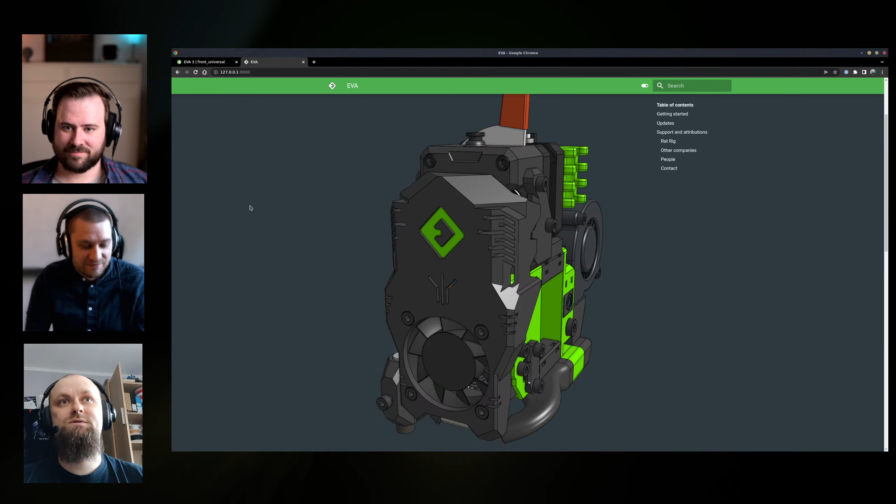But first the caveats, right? So I don't have all the hotends that we had on EVA 2 yet. So I guess make a poll on Discord and vote which one should be first to create, and I'll chop them into smaller increments and add those and prioritize in this way. So like Revo, it's almost there, but I know a few people ask about Revo, so it's going to be there soon. Right now it's BMO, Mosquito, Nova, and Rapido.

So they will come. Drives, got rid of all the front heavy ones, those are not going to be on EVA, it doesn't feel right. BMG is there kind of by accident because Mikkel forced me, since he needed one to test. Revo High Flow, please.

Yep, so yeah, make that poll, that would be best to make that poll on Discord, and then I'll do almost all of them in that priority.

What else? Yeah, drives, cooling inlets, I guess, that's one thing. The other thing is that for V-Core 3, if you cut your belts super tight, you need to order more belts, so be sure to remember that because it's not written anywhere.

I will publish the files and the documentation page in like 30 minutes after this.

What else? Yeah, chat has a good clue already. They're saying heat inserts.

Yeah, so there's every part. Let's jump into parts and maybe I'll remember, and you guys remind me or comment or stop me when I'm being stupid about something. So let's go to the document. I hope you can see.

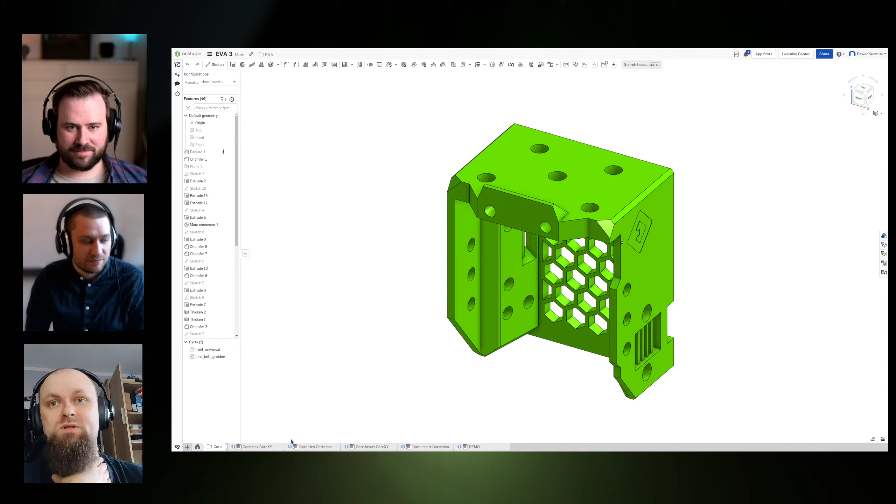Ah, you fell out again. Yeah, your audio died. You could hear the chitter and then it died.

So Mikkel, sing your best songs now. I stopped myself when he said 'you stop us' - I was almost about to sing Stop in the Name of Love.

Yeah, time for bad jokes, I guess. I wonder if people can hear us, or if we are just talking together. No, it sounds like - I checked the stream, it sounds like they can hear us. It's just Pavel's mic is dead. Okay.

I guess we can just fluff a bit in the meantime. Yeah, I think so.

So obviously, all of this stuff is Pavel's vision, dream, work.

And I've been working a lot on the- sounds like something's happening now. Is it noise? White noise. Yeah, it's completely over amplified now.

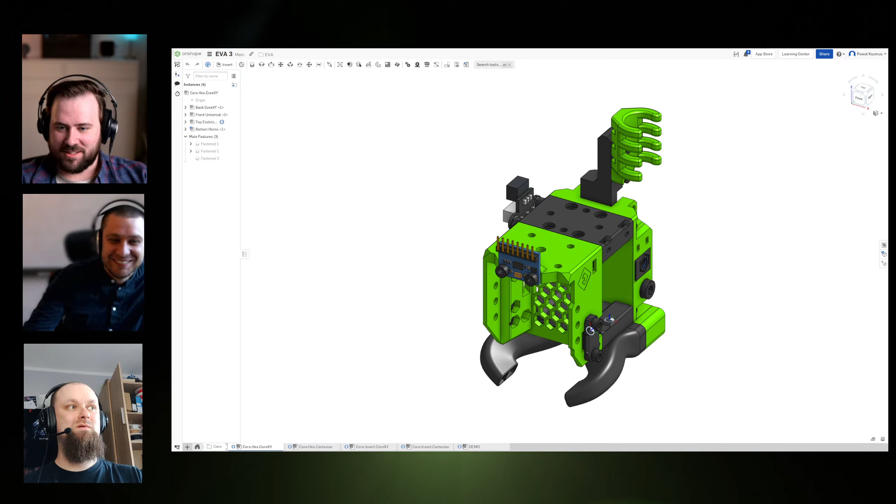Yeah, but... 1 2, 1 2, too loud? Yeah, it sounds better now. A little bit on the loud side. 1 2, 1 2. Perfect.

Sorry about that. So yeah, it's probably, you know what it is? It's probably the tea I spilled on the USB ports, and now probably everything that's the audio thingy from the headphones that I had on the USB - I probably need to do something with the USB or the motherboard. Great, yeah. All right, sorry about that. It's like, yeah, tea does something with electricity. Yeah, okay, that should be better. I'm not connected directly to the sound thingies in my PC. That's a technical term, by the way.

Okay, so Eva, the core of it, right? So the top, the bottom, which has the integrated duct right now - kind of still on the fence with it. Don't know, right? It's kind of easy to change, not as easy as it was before, but since all of the printability issues that people had, we kind of went with this approach, because it's bigger, so there's more area.

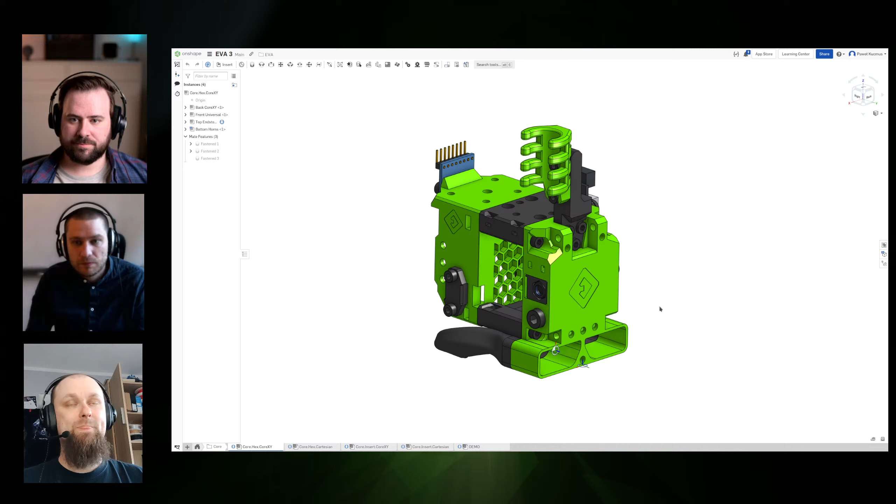So yeah, the back is separated from the cooling inlet. Right now cooling inlet is a separate component, which we'll go into in a moment. And the back, as usual, is specific to the motion system, so Cartesian or Core XY. You choose that depending on what you have.

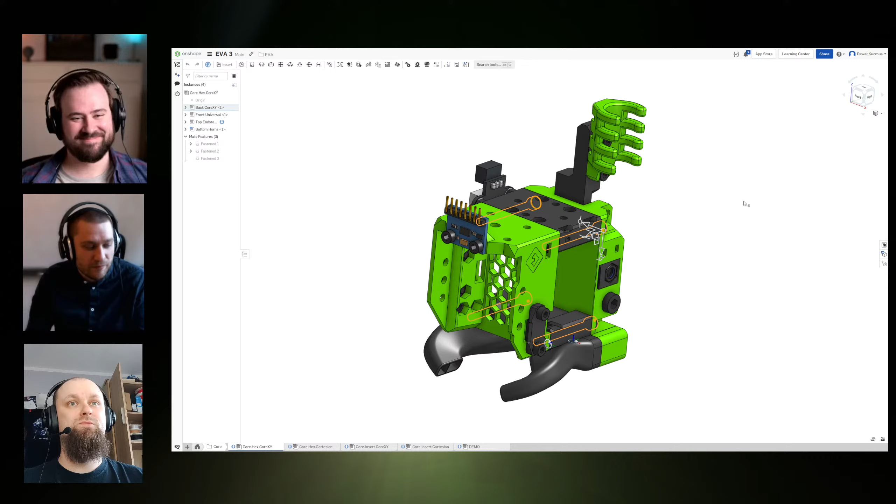The cable holder is the same screw spacing, if I remember correctly. You bolt everything in from the back, and they go straight to the front face. The universal face is a new piece, as you can see.

It was a lot easier because EVA 2 kind of suffered from its inheritance from EVA 1, which was designed around V6. So all the spacing - what I did there, I put V6 in Onshape, a model of it, and kind of worked my way around it. And now it's 2022, so that had to change.

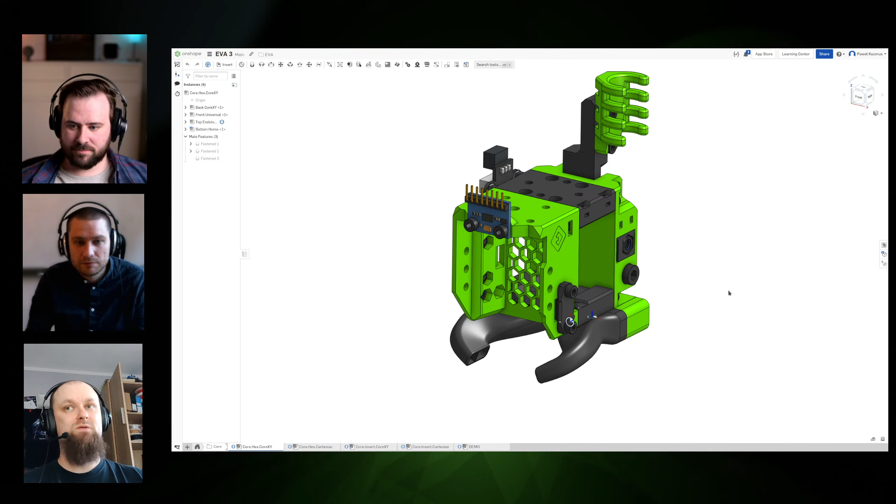So I started with something different. Those are now much smaller, right? So working through them produced a much more resilient base, I guess. No V6 as of yet - I will probably still fit it, but yeah, the product of that exercise is much different.

We'll go to the hot end part in a moment, but yeah, the belt mechanism is much, I hear, better. Much better, yeah, it's easy to install now. Yeah, it's much easier to both take it, install, and adjust. Take it from people that did it like 20 times now. Yeah, it's much better now.

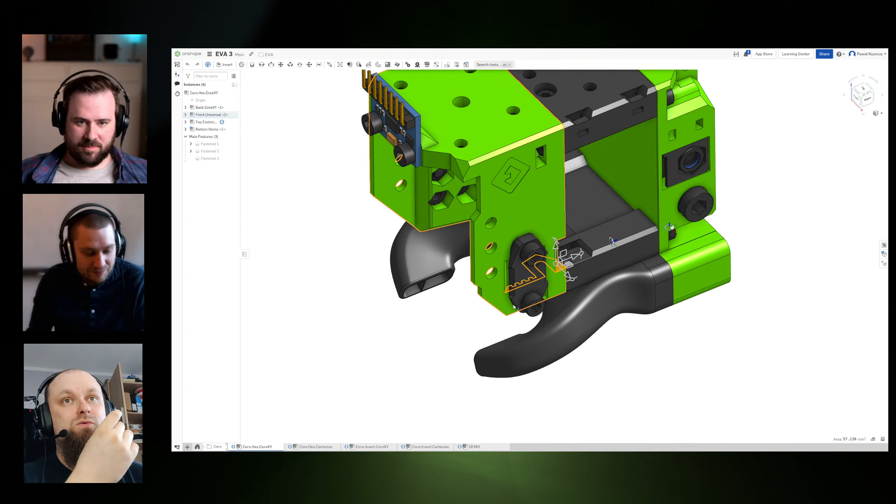So you feed the belt through here, and the belt is attached to - as you can see, the clips over here - whatever the orientation of the belt is, really. It's only one on the V-core, but let me...

They just say we're too silent. Yeah, I think you accidentally turned down our volume when you tried to lower yourself.

You are too silent, me and Mark apparently. Can you see something now? Testing, now you talk double the loudness. Is it better now? Why do you get the chat quicker than I do? I don't know. Can you even hear them at all? Yeah, it seems to be right now. I think we can continue, they're all saying it's better.

Okay, moving on. All right, 20% more, 50% more, I'll try. Okay, it's better, bit low. OBS operates in decibels, so I added 2, whatever that is. Don't add 80 decibels please. That's not good, 3 is double.

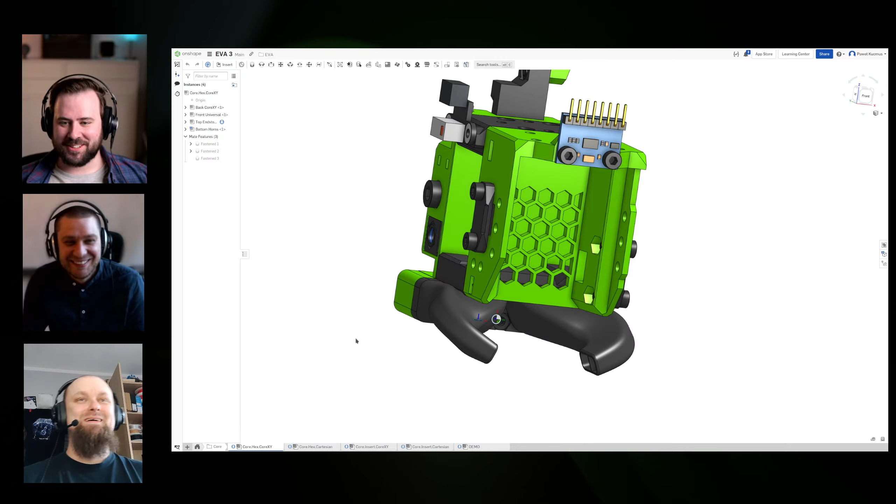Correctly, okay, so we go from here. The probe mount, that's important. The probe mount is now on the universal phase, so it doesn't change when you change the hot end. This whole thing is like a quality of life improvement for me, since I disassemble and assemble EVAs a lot.

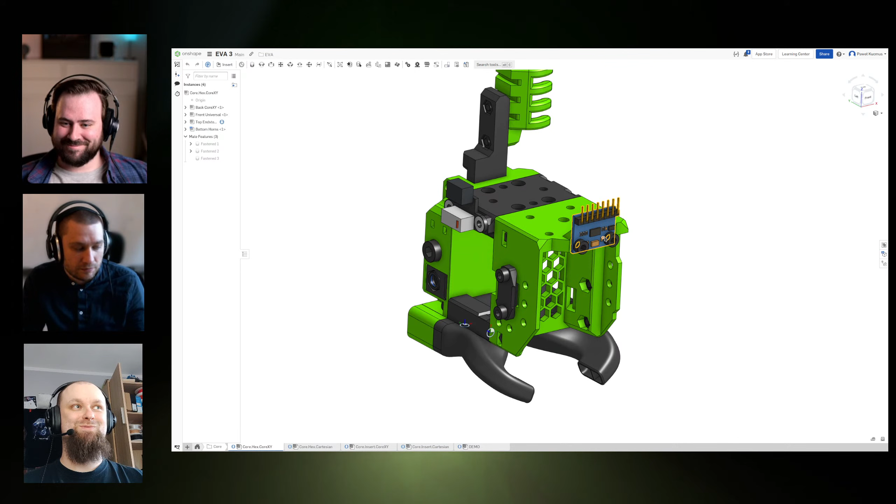Different variants you already saw: heat inserts versus hex nuts. So I was locked in the basement and forced to add heat inserts. So every part is produced first with hex nuts in mind, because those are bigger, and then in post the hex nuts are removed and the holes for heat inserts are added afterwards. Those specific heat inserts should be more available than the other ones, right? Or not, there is a specific link I guess. The same heat inserts that Lev used, I guess. Right, yeah, it's 4.6 OD, will work up to 5 millimeters outer dimensions.

And by which size hex nuts? The M3 ones, yes, did everything M3. M2.5 doesn't make much sense, to be honest.

They're still complaining that we're too low. I can shout, let the German out in me. I added 1 more decibel. Oh okay, try 3, try 3. I just tested before. That seems closer. Added, it's hard that we can't hear it ourselves. It's a really long feedback loop through the users. Yeah, it's stopped completely showing that you're speaking.

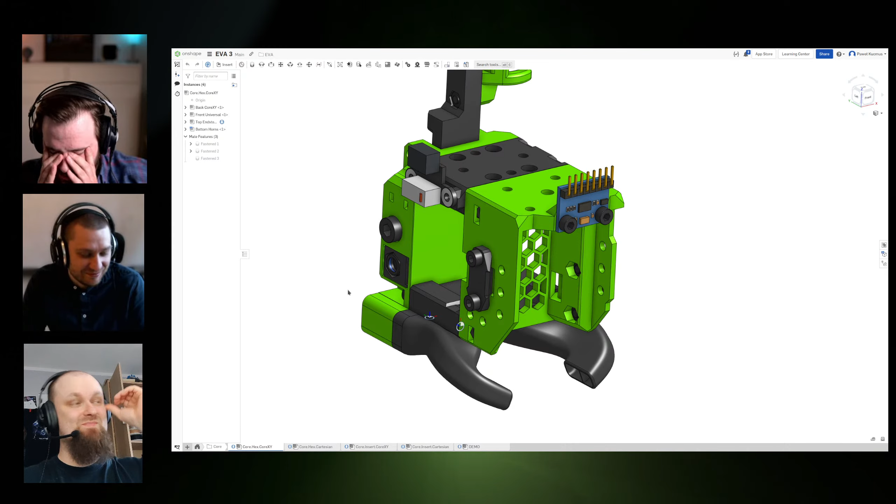Okay, let's just assume. I can move a bit closer, that's better, because if I touch something the wrong way over here it will burst. I'll just talk a little bit louder then, this will be fine I guess. This will be like half EVA presentation and half technical difficulties. Now let's try to get something done, I guess.

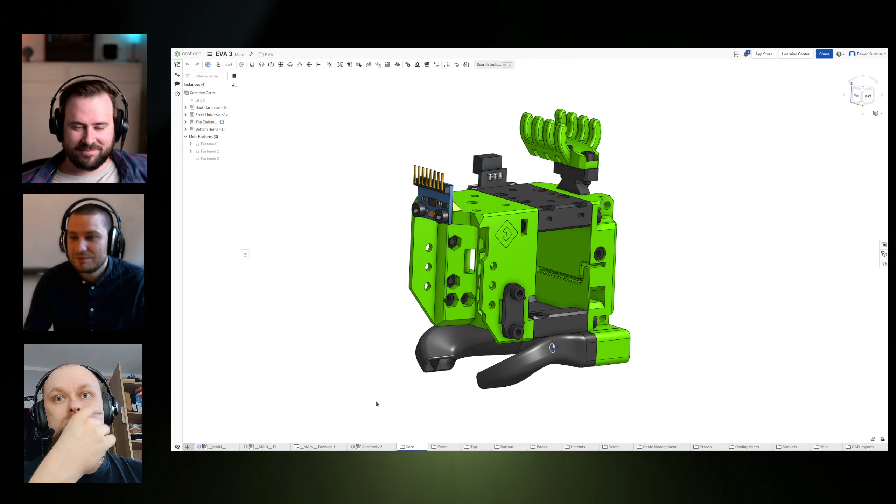So the core is basically always the 4 parts. Yeah, okay, 5 parts - the cable mount is here as well, apparently. So you have the core, hex, Cartesian. You kind of should get the point, right?

Moving along - the front is a part of the core, the top as well. There's only one top with one end stop, and this is a compatibility issue because it's a little bit higher than it was before. So we need to figure out the X end stop blocks. I will make something to make it work.

Yeah, they found a stupid heat insert folder, is somewhere over there. The bottom I explained, I think.

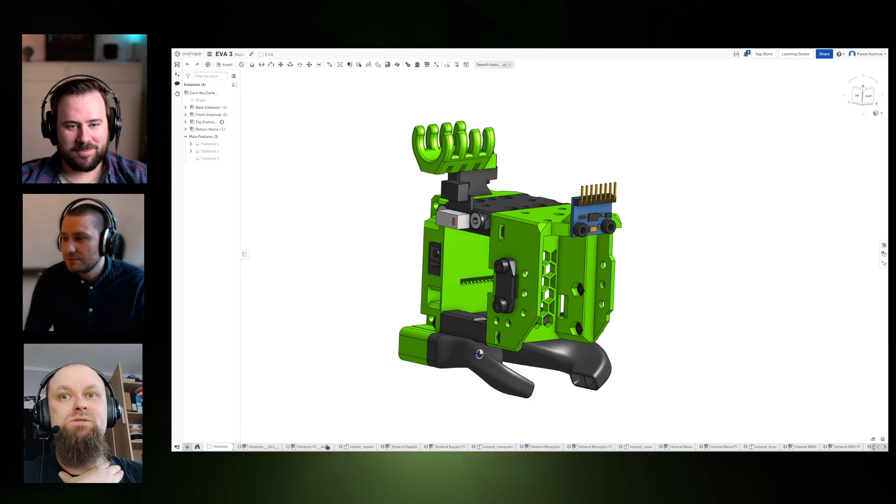The backs, the hot ends - okay, so the hot ends, this is or should be fancy. So this is BMO. Let's look at, I don't know, Rapido. They are all in the same kind of cavity of the universal front.

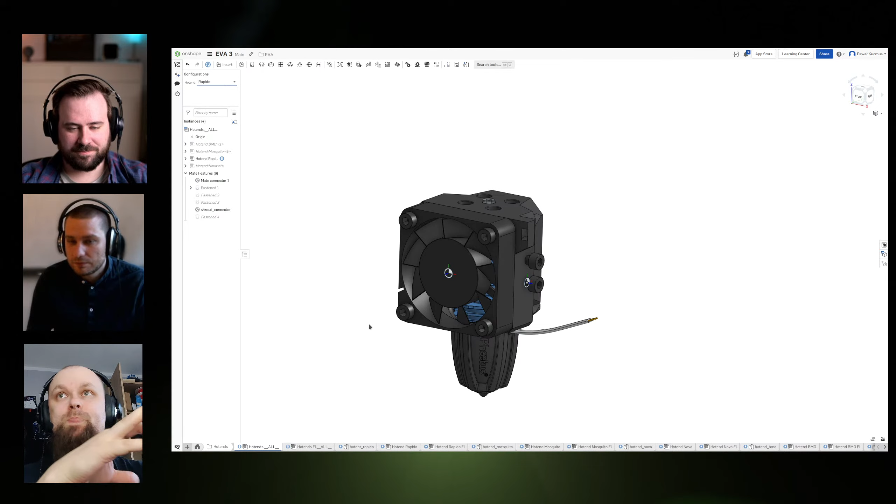It's a standard on its own, right? So you can fit those heat block hot end parts in there.

They all provide this one little small flimsy hook for the wires if you want to go up. If not, you can use the back zip tie thingy. And what's most important about this is that there are just 4 screws from the sides to access it to change the hot end.

And it comes, it's much more stable than before.

Your audio dropped out again. Anyways, I'm just gonna continue a bit while Pawel figures that out.

So it's much more stable than before, like a lot more. Especially the Rapido on the EVA 2.4 had some wobbly issues. That's gone now, so that's very nice.

And you can just remove those 4 screws and you can take out the hot end with the fan and everything. So it makes it fairly easy to hot swap hot ends.

And it stays in place without the screws, so installation is really easy. You just snap it in, and then you can put the screws in afterwards, and you don't have to hold it in place by screwing and stuff like that. That's really a nice quality of life feature, actually.

Especially for people changing a lot. Yeah, definitely, that is a nice improvement. I think that's basically about the hot ends, there's not much more to say about those, I guess.

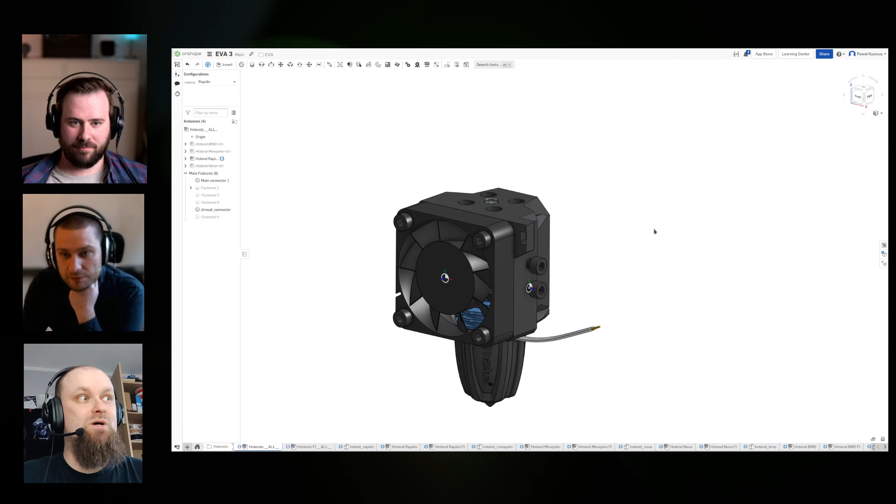As Mikkel said, it's accessible, it's more stable. We don't need the flimsy support parts, which were hard to print and maintain - really, it was super hard to make them work. So now those are the chunky blocks. All the air, we control the air, we control the mounting.

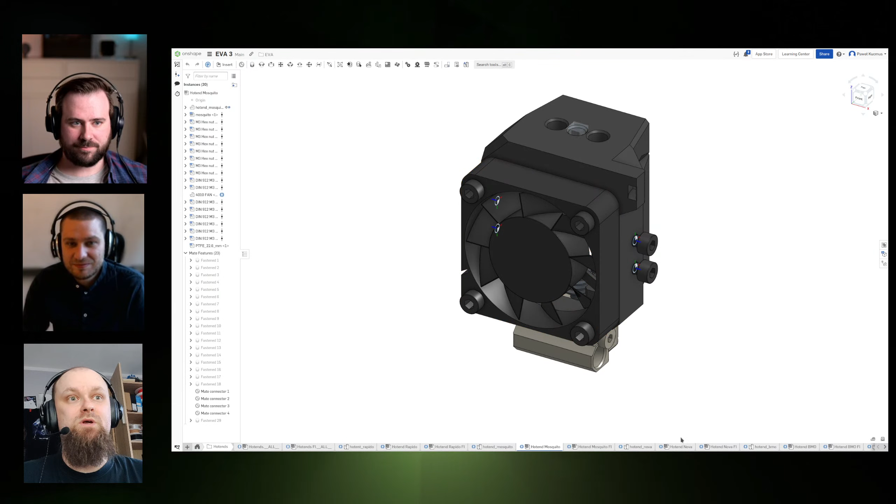Again, heat inserts and hex nuts as they are. Rapido, Mosquito is there, Nova is there, BMO - and it starts crackling again. So all the parts should be here. Those are exported, will be

deployed with everything else. Dragon drama, which let's not make it a drama - I will not officially support Dragon. My decision, right? Kind of end of story, if I can put it this way. Revo, not yet, due to my own personal principles. I will try to predict accusations - Slice did not have anything to do with it.

If you want, you can talk to Mikkel to hear that side of the story, because we were kind of in both camps, but different camps. We agreed that it's something I want to do, but it means there's no support from me. I did provide all the means for you guys to have the support if you want it, like in any other way.

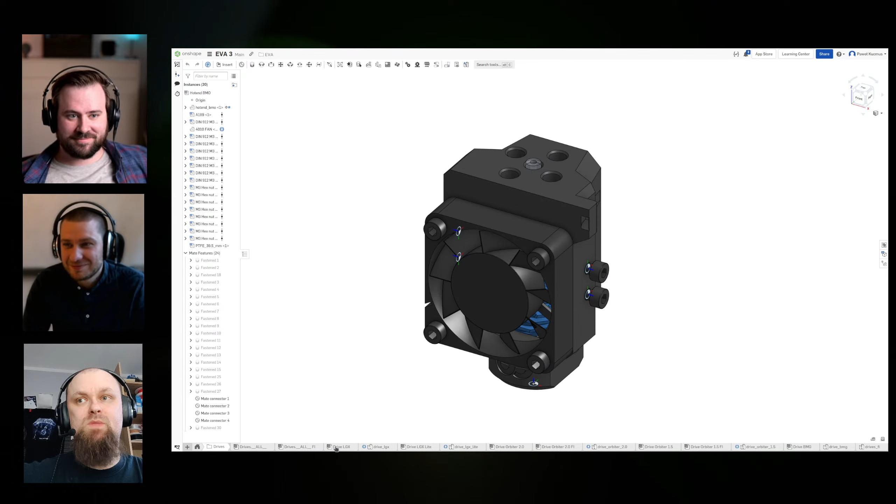The drives — LGX. Let's just move over from the patents, all that stuff. I really don't want that to overshadow the release, even with a broken live stream. Sorry about that, I'm going to feel guilty a lot. But take it to Discord, make a channel over there, and maybe repeat what was already talked about so many times over there. If I may ask you that, please go and do that.

The drives, that's the second thing, if I can move on. Takoto support — you guys keep asking for the hot ends. Do that Discord thingy, please, or we can discuss this on Discord in a meet in a couple of days. Mitsuma, maybe you can make a poll on the EVA channel, and we can put Takoto over there as well.

I like to have, with drives not so much, but with hot ends I like to have them in my hands to be able to work with — it's easier for me at least when I have more than just a model of it. So I would like to have my hands on it, even for just a moment, to be able to work on either one of them really.

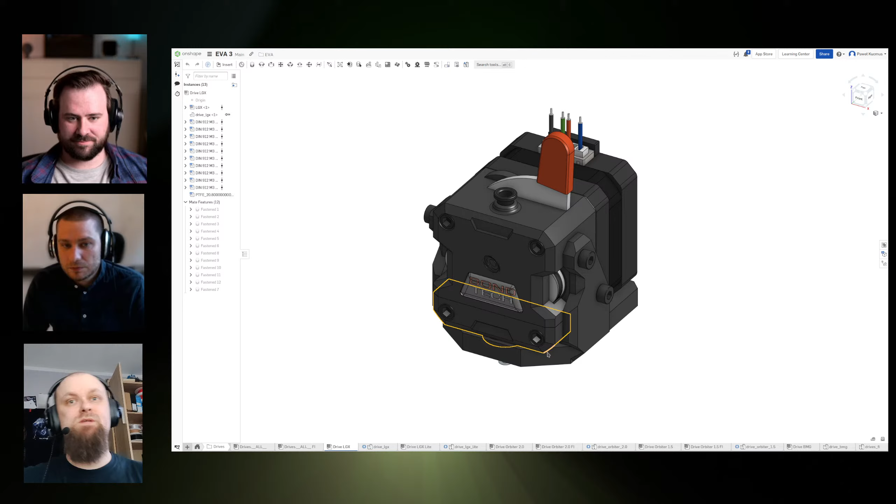So drives: LGX Lite, Orbiter 2, Orbiter 1.5 — I'm not even sure if it's sold anymore, but if you guys have one lying around you can use it just fine. BMG comes with a caveat that the cable mount doesn't fit perfectly, so go through Onshape and you'll find a different cable mount for it. Over there it's probably not described the best.

And the thing with drives, that's a major improvement as well — you don't have to take the whole carriage off anymore, because it's a separate part from the top, which is huge. Everybody who did that with their EVAs right now, I hope will appreciate the thought put into this.

Sherpa Mini and Micro will be supported. Do the same thing with the poll, and I'll add all the support, especially the ones missing from the previous version. For the drives, you can post build and kind of put them on. You may need to take the motor off, like from the LGX Lite, to access all the screws, but that's nothing compared to what we had to do before.

I actually tried this morning — if you use one of those hex keys at an angle, it works perfectly well without removing the motor. Even better, nice. Like the ball head Allen. Yeah, right, cool.

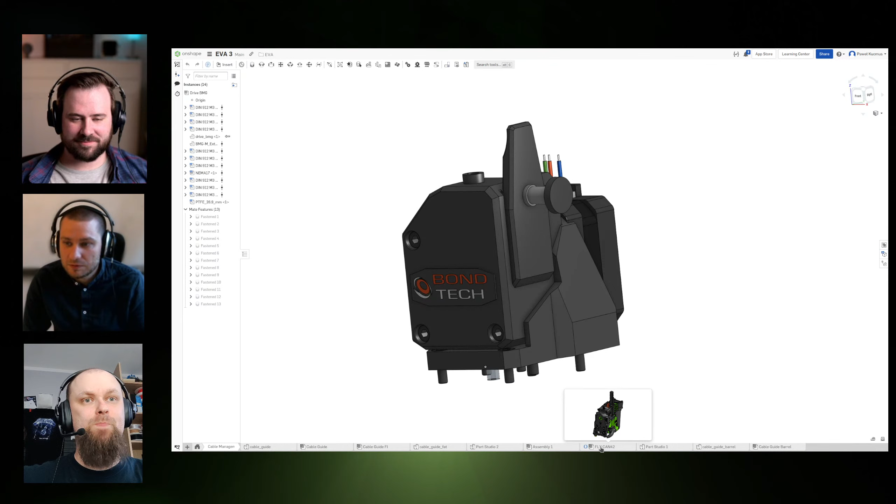Cable guides — there's a lot of stuff that's not released yet, like the fly thing from, I forgot whom. Mellow, yeah. So the tool board.

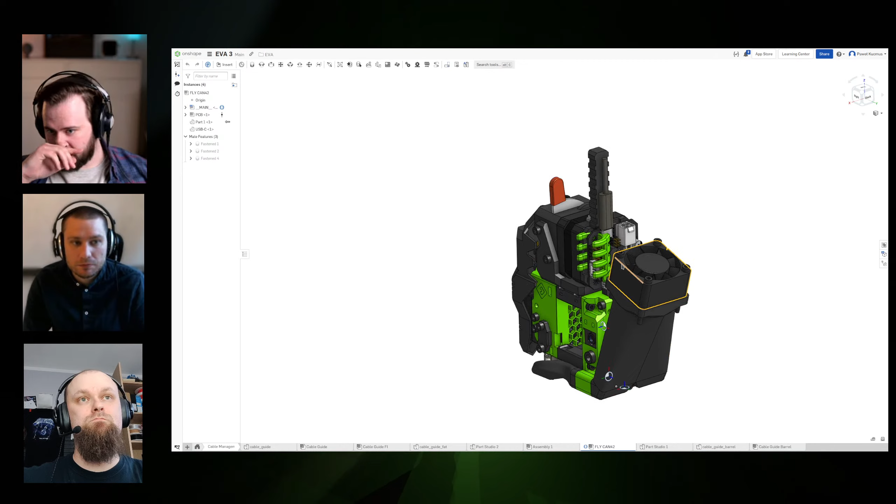It's working super well for me right now. Same for me. And the mount, like the support backplate you made, is perfectly rigid as well, supports the USB cable very nicely. So I have no complaints about that one. But of course, right now there's only a backplate for the 42; the 36 still needs some work.

I hear a lot of static noise. I'm trying to see what that's from. I don't hear anything, I think it's from your side. Yeah, might be. It sounds like a fly or something big. Hold on, I'm going to mute myself, this is going to be loud. Now it's my turn to get audio problems, isn't it? Yeah, that fixed it.

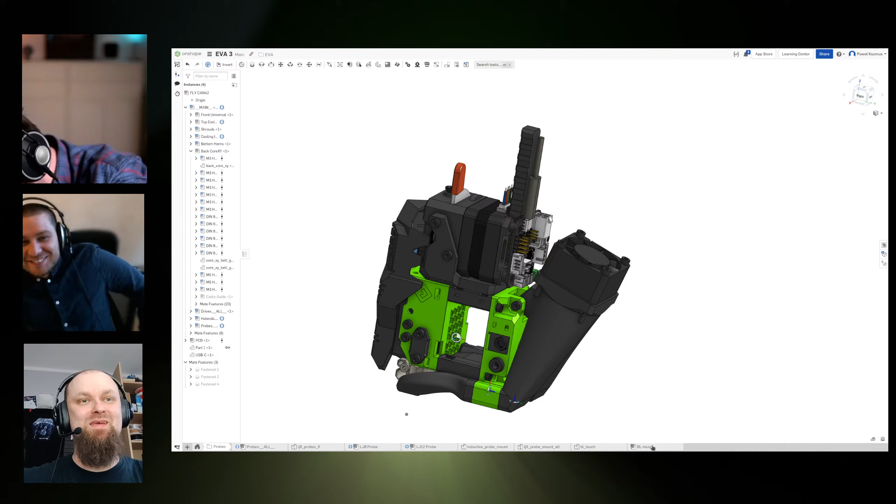The LJ8 probe with proper support for the short ones, that's the PF probe, right? That's better now, SuperPINDA style. Yeah, those look good.

I'm going to increase the gain again. Looks like the short probes are supported better now too. It's like a Klicky probe, I'll add that as well soon. You can adjust the probe more easily now with the screw from here.

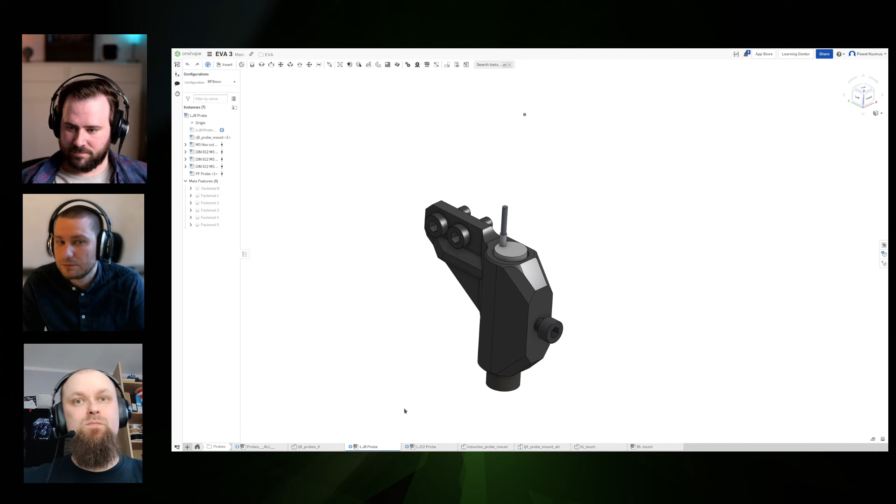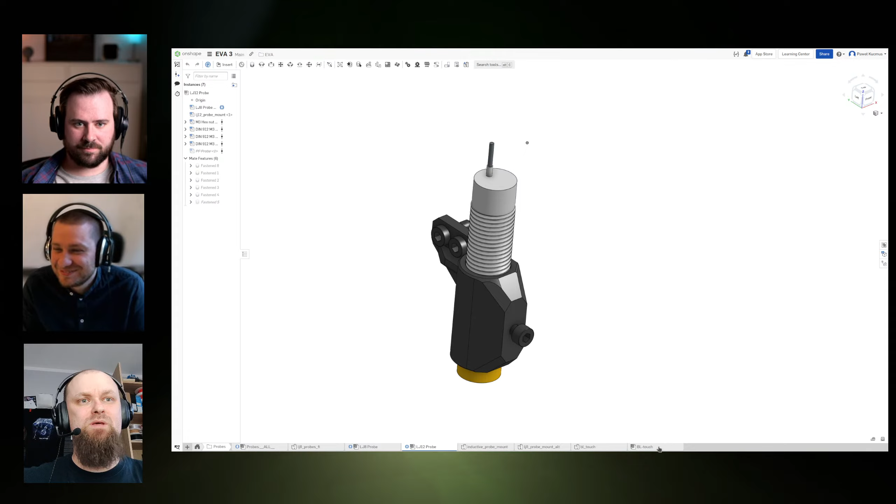You'll be the judge of if it's good or not. I hope it will be enough. It works just fine, it's just hard to put the nut over there for the hex nut version, the 12mm one, the BL Touch one, which looks messed up over here, but it's just the model - probably an older model for an older BL Touch. Sorry, cooling inlets.

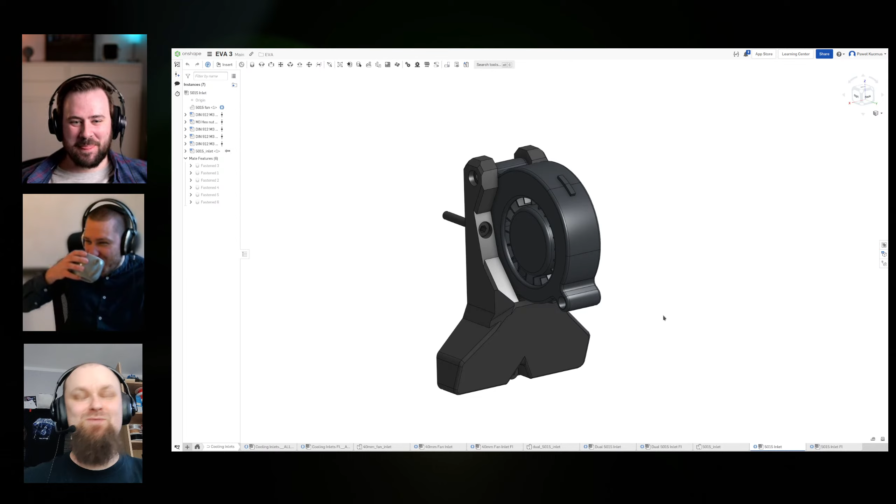This was also something, right? This is a big one for me personally. I think it's awesome, so this is the best one, the most important one - the single 5015. You can benchy all night with those, with these ones.

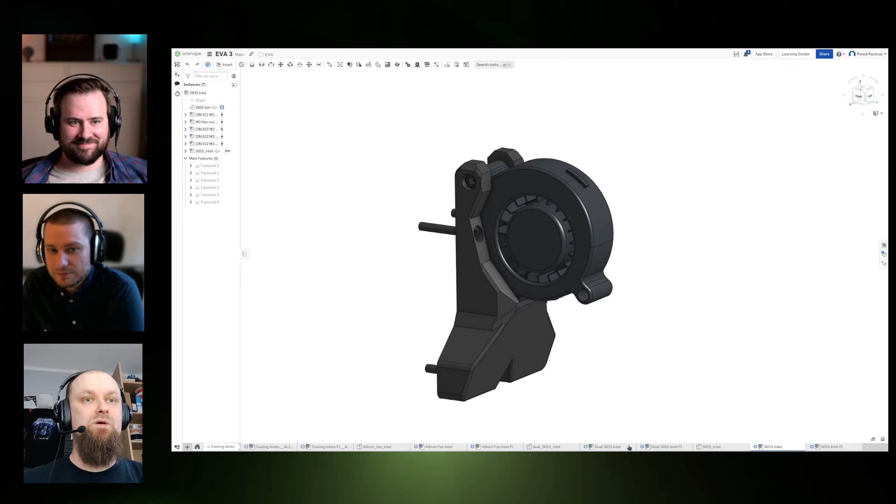But they'll say you shouldn't use that, right? But if you only have that one 5015 fan, you can use it with EVA 3 as well. This is not to leave anyone behind. You have the dual one, which you can also put post build on the core of the EVA 3, and you have the 40mm fan inlet over here, and there are rules for that fan, it needs to be an appropriate fan, right? I guess I'll shut up and let you talk about it.

Yeah, so naturally I'm the most excited by the 4028 native support now. Yeah, I'm excited as well. Those are just very nice, even at lower speeds they're super quiet and they're just a lot more reliable, and they provide a metric ton of airflow if you want them to.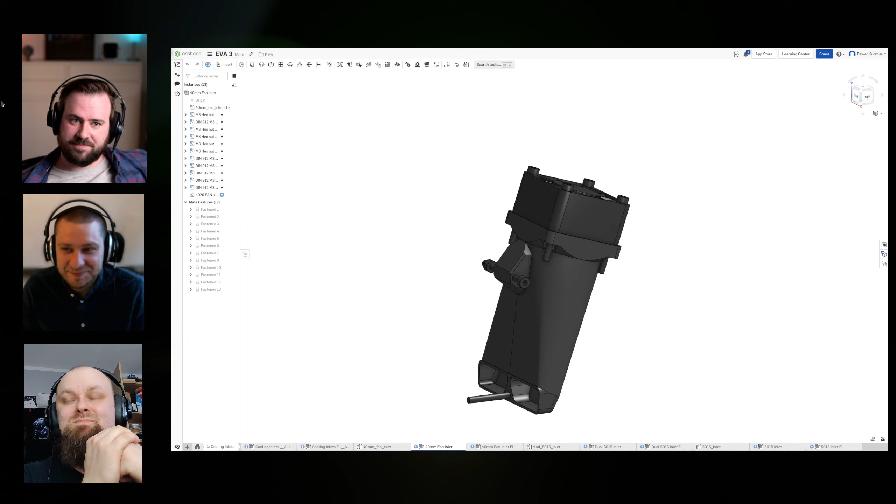So yesterday I did a 10-minute benchy in PLA with zero cooling issues, and today Mark did an 8-minute one. Wasn't it 8 minutes? 8 minutes 40, so almost 9. It works incredibly well, and it works for low speed printing as well. They go really low in RPM, so yeah, I'm excited about those.

We kind of found out that the Sanyos were better than the Deltas because they're much quicker at reacting to speed changes. Yeah, I think we will just publish something comparing those as a guide, we'll put some notes somewhere.

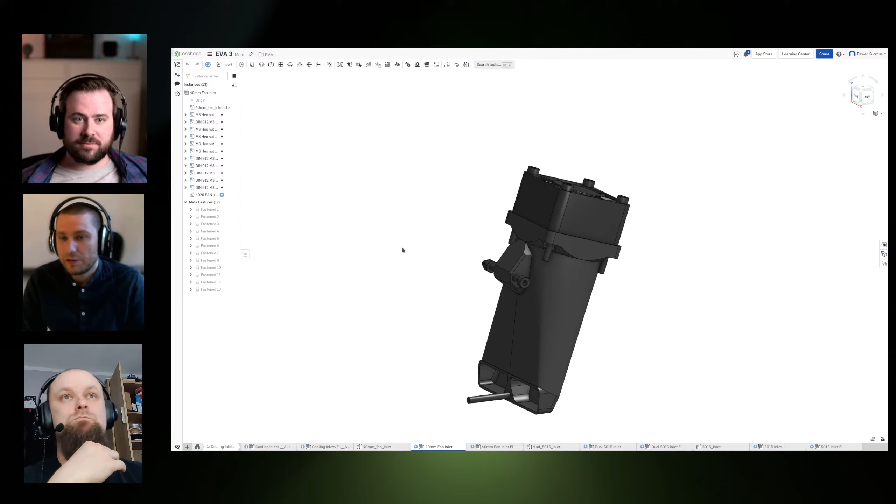But yeah, this is super awesome, and the dual 5015 is going to be great for a lot of people too. So yeah, that's awesome, and you can just change between them with like 2 screws. It's really great, really easy to swap those because it's a separate part, and as Mikkel said, 2 screws, it's like 1 minute of work. Yeah, it is nice.

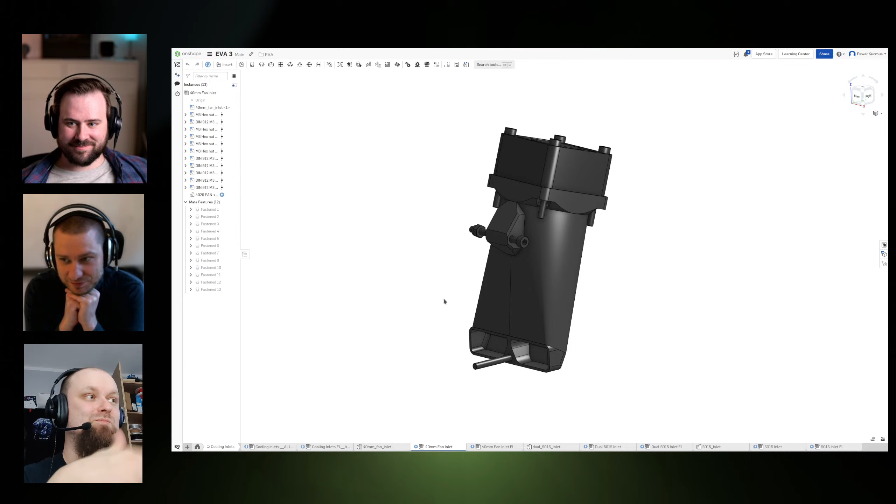I heard about a lot of things when it comes to CFD, right, computational fluid dynamics, and we went a little bit into that - static pressure and so on. But for me, a fan goes brr or shouldn't go brr, and that's my only requirement.

So yeah, they pushed all the cooling to be as great as it apparently is, and we have benches to prove it, right? Yeah, and the cross section is as big as the monster super sniffles - I can't remember the names of all that stuff. It's almost as big, I believe it's a little bit bigger, but the ducting itself is a little more conducive, I think.

To the airflow and pressure we got to deal with, I think performance-wise it's hard to tell, but I think it might actually outperform it. But that's hard to say yet. I haven't done any direct comparisons, but it works very well. Yeah, I think there's a lot more to say when we get to the ducts, what are the basic thoughts behind it and why it's different than it was before.

But generally, I think we haven't reached the end yet on optimization. We're already at a really good state, I think, but there's still more room for improvement. And I think we'll see a lot of user mods as well, playing with some concepts, and there will be a lot to be gained. Yeah, definitely, we've tried some really funky things already - we'll get to that later.

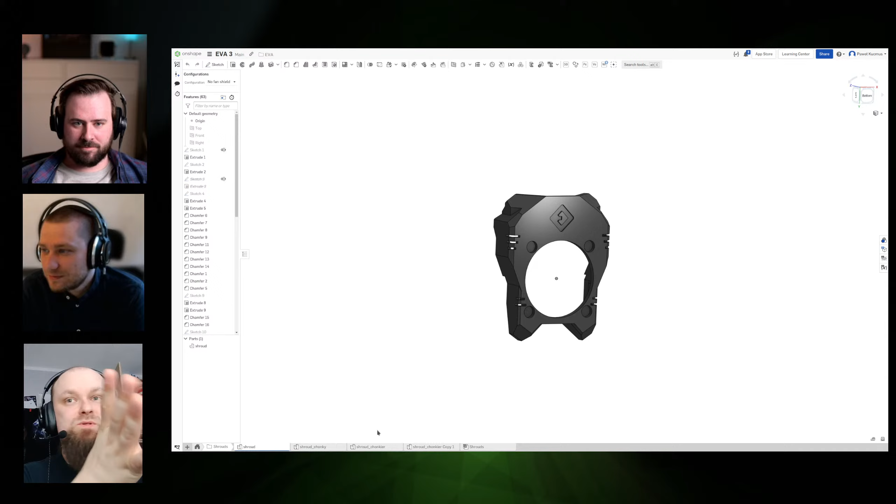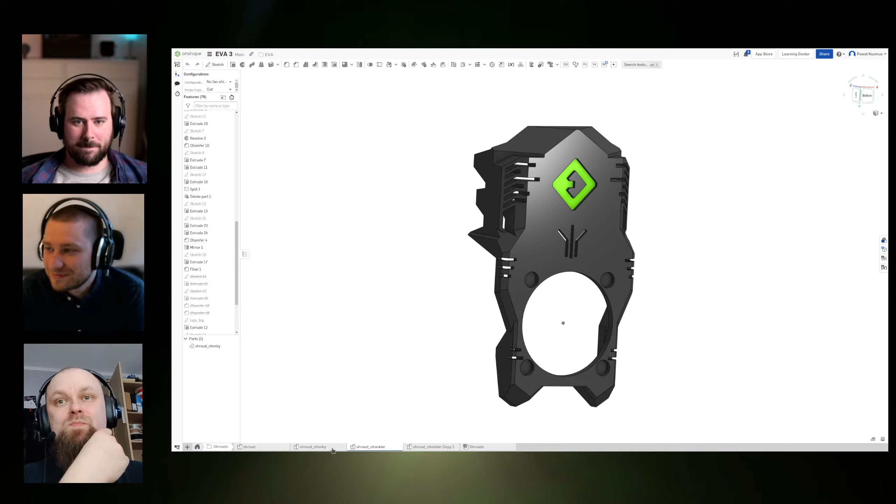So there's going to be a bunch of them probably. This is the small one, which I completely hate, but some like. I made like a super featured one over here, you can print one layer in green, you have a green strip over here. I have one like that behind me mounted, so I won't show you. But yeah, it's like this one. I don't like this one either anymore. I think my favorite was this one, but you might see a complete wipe and I might redo them completely.

I don't know, those are just shrouds. Don't get attached, please. And the whole thing looks like this if Onshape actually loads it. Let's maybe refresh. Yep, and the whole thing looks like this.

So, as described and promised, you have, for example, the orbiter. You just put it on top. It is mounted way stronger than it was before, right? Because there was a history of an orbiter ripping itself while climbing on the filament.

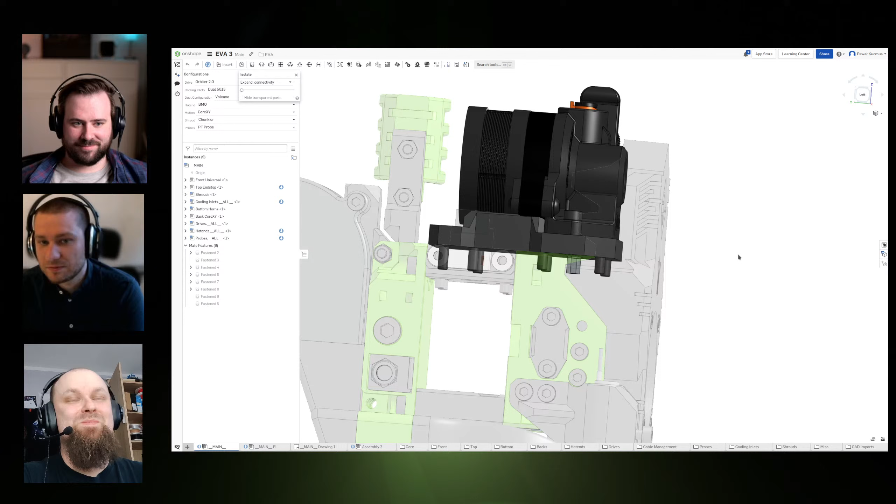It ripped itself up. There's no flexing anymore, there's zero flex. I really tried it - actually, I put a lever on it and tried to flex it. Very nice, stress testing. I broke the plastic at some point, but it didn't flex. Yeah, it's really solid now. That's going awesome.

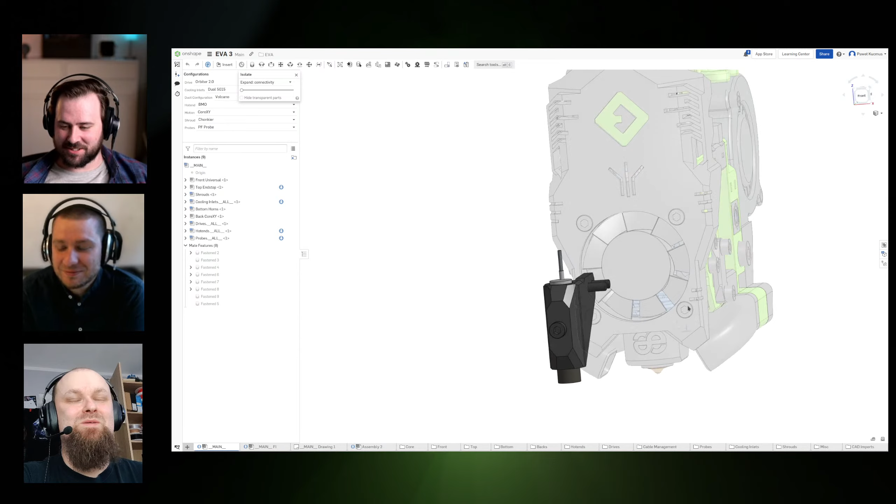You can change the hotend without changing the probe and its position, right? You kind of don't know where the nozzle will land because different hotend, different tightening, a lot of things can happen, but there's more of a chance, at least.

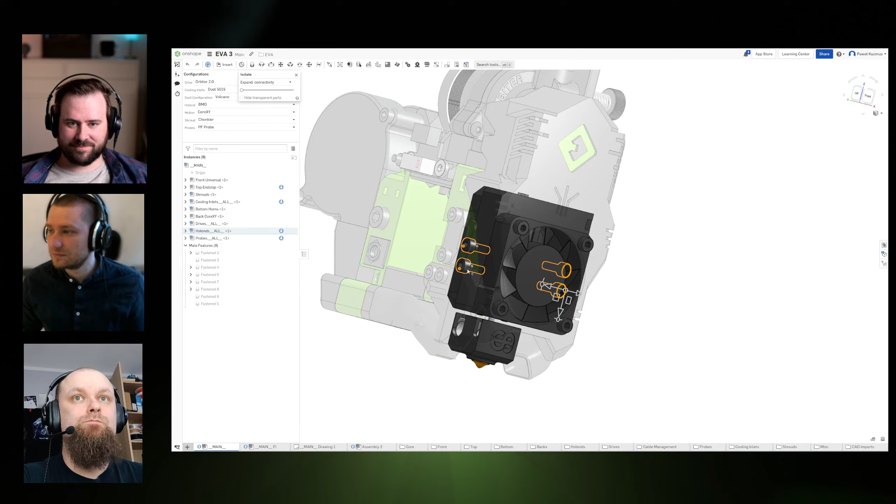Let's take a look at the hotend block. Yeah, you can see it uses 4 of the 6 holes over here. There's always an extra pair because some of them are higher, like the Rapido I think is higher. So yeah, just the 4 screws, like here and here.

Yeah, and I'm running out of things to talk about. The volcano duct is huge. Yeah, I think we can talk a little bit about the ducts. Please do, because I have no idea what to say about it.

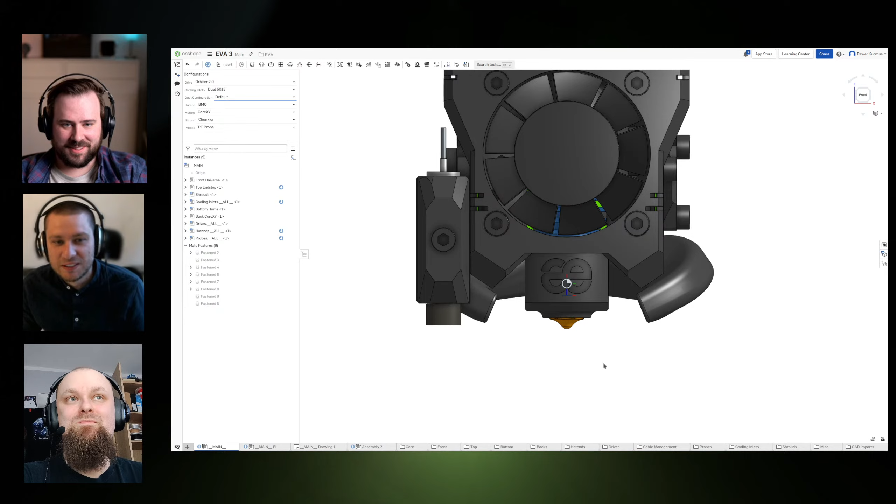Yeah, the first thing you will notice is it's no triple duct now, it's dual. And the basic idea behind it is that it's really hard to balance a triple duct in cooling front to back. And every time you find a balance and some boundary condition changes, like only the speed on which your fan goes, the balance will be lost. So we need a system that is really robust in terms of it behaves the same for really different situations.

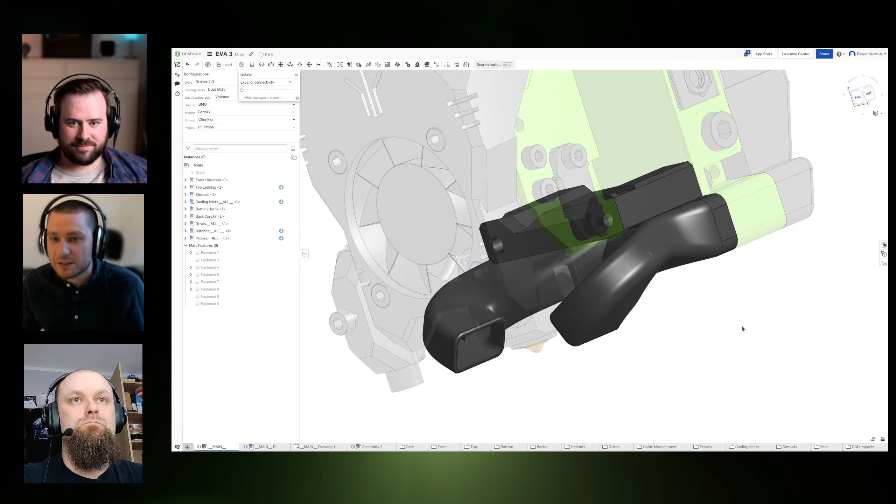From fast accelerations of the printhead, for different shapes we print, and also for different static pressures from behind, because the static pressure is really different for the volcano duct and the non-volcano duct, for example. And so we decided to go back to dual ducts because they basically allow to get an even cooling. But of course, there's one issue: when we push the air forward, all the air gets pushed forward.

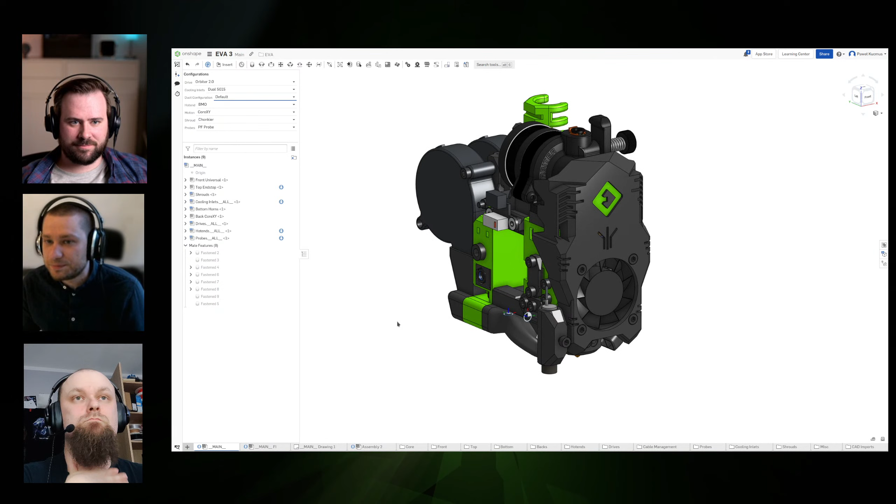And what we did now is to have two separate travel paths for each duct. There are two - help me out with the word, Mikkel. Yeah, well, we called it fins, right? So we put a fin in the middle. So we have two separate streams on each side of the duct that we can handle.

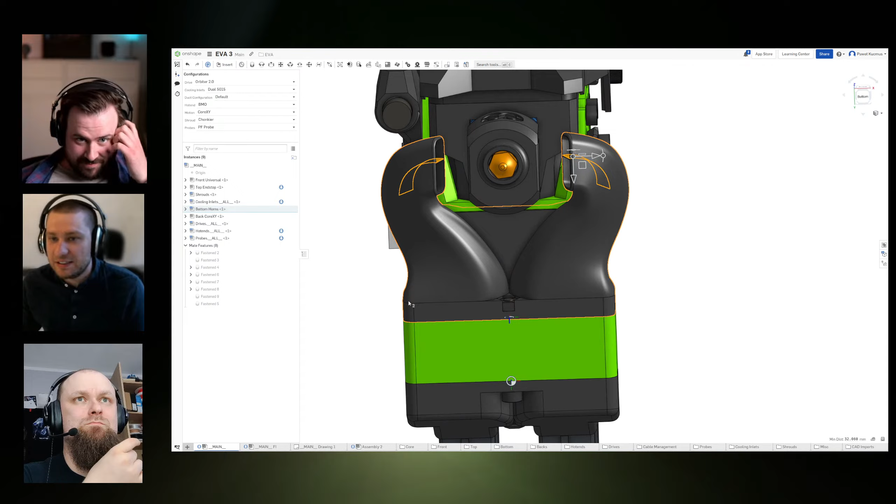And what we're trying to achieve is, it's always a trade-off between static pressure and how laminar we can get the flow. And when you remove all static pressure, you won't get laminar flow anymore. And then we have a lot of input variables like the roughness of the surface and stuff, which is bad to have as influencing parameters, because then we are out of control how it will work on a user's side.

So we added those fins, and we did something - we let the two streams interact at some point. So we open those fins up in a specific way.

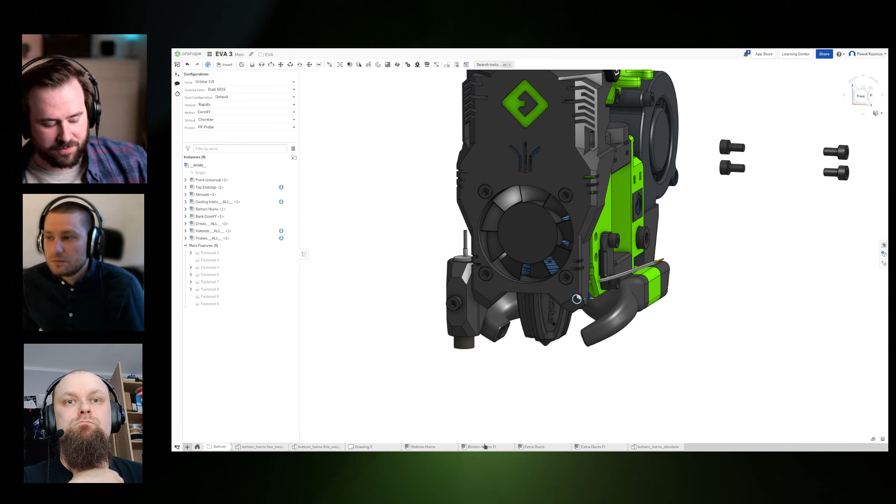Maybe, Paul, if you can switch to a volcano hot end. Or the volcano duct in particular, because that's the one with the dual fin stuff - we needed it for that one when we tested the first iterations of the volcano duct. It was very front-focused cooling. So we had to do something to get it to cool the back of parts as well. And yeah, you go ahead on that one, Mark, because that's your area.

Sorry, no, but Mikkel did the work, to be honest. I just always gave some thoughts, and he implemented it.

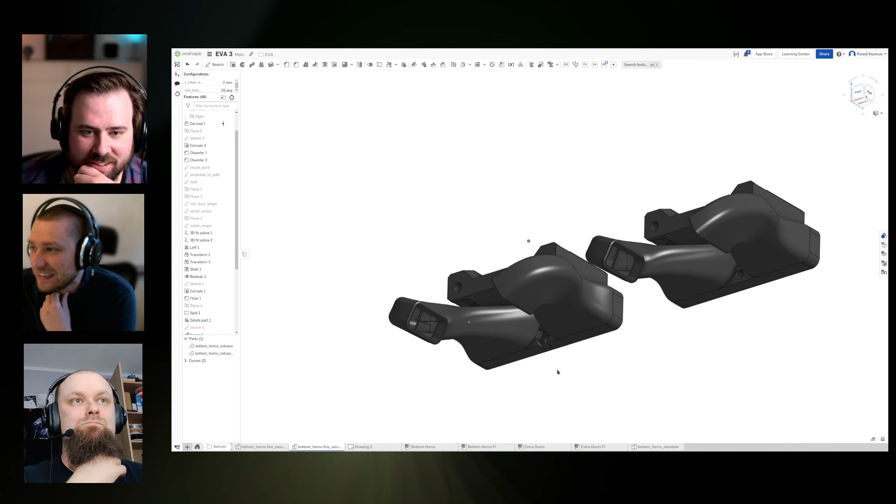So when we talk about cooling, we need to think what cooling actually is. Cooling is not hitting air against something, it's dragging air away. We need to drag the heat away.

To interrupt here a bit, Paul, something's wrong with that one. It's missing the front fin. Yeah, we'll fix that later. It's mostly for demonstration purposes.

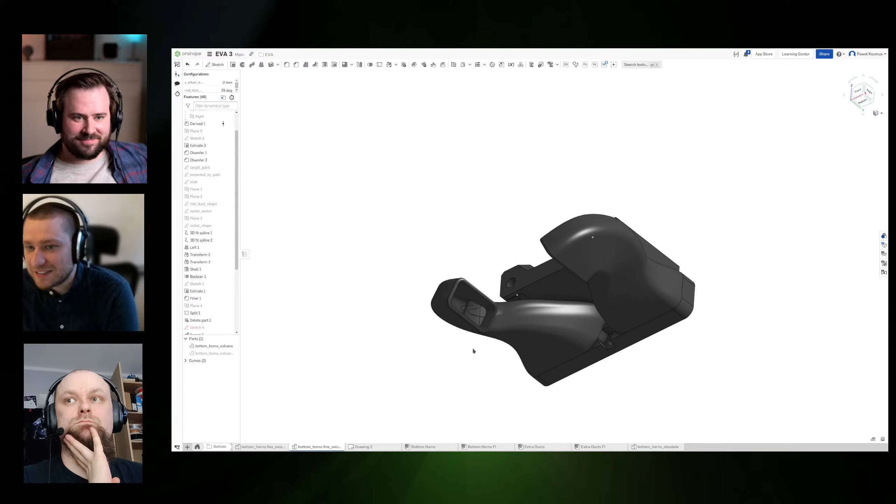So we have this fin going around, and we actually use a different cooling concept for the front and back side of the print, which is pretty insane to some degree, but I think we managed to balance it well. Those two streams interact in a way that we create turbulence on purpose, and then go back to laminar flow, which makes it basically impossible to do good computational fluid dynamics on it, because the system just isn't like putting it in software, clicking a few buttons, and getting results you can rely on. There's just no solver that works with this situation, so you'd need to change solvers for different areas of the duct. It's insane - this is where it helps having a physicist.

So we basically winged it with basic principles, and I think it worked out well. The front air still gets pushed to the front a lot, and the back air a little bit, but it dissipates in other directions as well. That's basically what it does - it evens out the cooling a lot.

The volcano duct performs really well right now because of that principle. We're probably going to iterate a bit on them, and I can see something is a little bit borked right now, so we'll have to fix that too. But it's printed and it's working.

Yeah, exactly, and I think it's also really robust in terms of printing quality, wires, and all those kinds of things. I tried different layer heights and stuff, and it seemed to perform similarly.

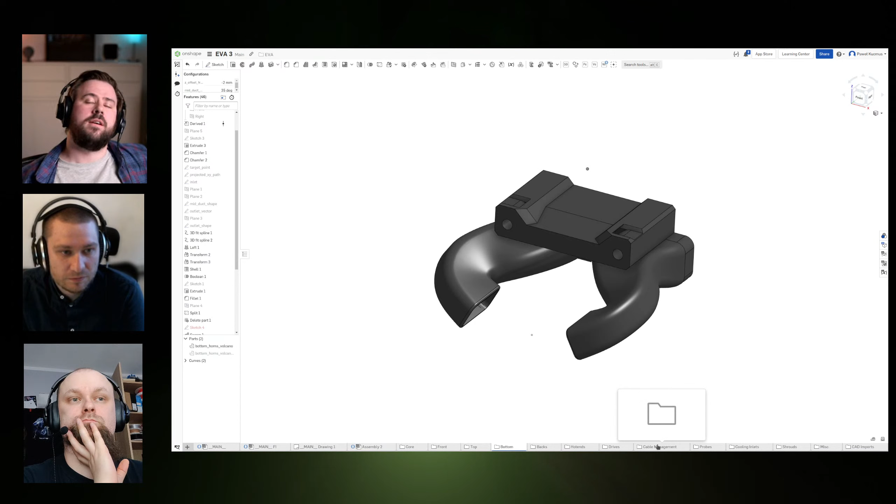Let's see, I saw some people asking about Klicky - I guess that's the same about Euclid. I don't know, Pavel, do we have any plans about adding native EVA support for Klicky and Euclid, or will that have to be mods?

I think we can add them. There's not much decision making when we're talking about components that are not depended on by any other component, like the probe. There's not much thinking I need to do if I want to promise to maintain it later on.

So yeah, I guess we can do it, especially since - and I'm sorry, kind person, I forgot your name - we talked with the creator of the Euclid probe. What he did, I helped him do the other one for EVA 2, and he just took it to maintain on his own, I guess. So I think we can do it again for this one. There was just no time.

But yeah, it's an easy mod to do as well, so I think it's not that hard. It's just, of course, Pavel has to maintain a lot of different things, so when he changes stuff, he has to go through every part, and every part that is added is a lot of additional work.

I'm not sure if I ever said that today - probably would, if not for all of the issues. I'm going to be very apologetic about it, so sorry again, but this is really a release candidate. It's not like a full-fledged release, so expect things to shift - give it room to shift.

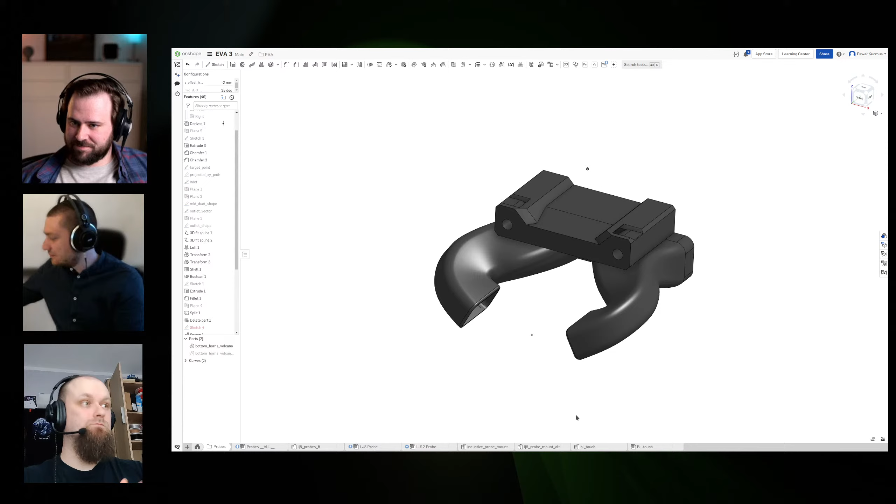There was a question about why no full 360 duct, because it's very hard to control.

It doesn't work well. I don't think I've ever seen one that worked particularly well. You have to imagine what you're doing - you're pushing air from all sides, and where does the air escape? That depends a lot on the printed geometry, and that's something you don't want to have. The other thing is you have to redirect a stream 180 degrees, basically, and it's almost borderline impossible to do that. It has to be fully laminar to have the same balance between front and back, because you need more pressure to the backside, of course, and you can only balance it through different velocities of the air when it's completely laminar. But if it's completely laminar, it won't cool well. So it's basically impossible to get this done. And the other thing is when we split the air in so many ways for so many directions, the shape of the air pushing in is really important. By accident, I wanted to compare some fans, and I did a cross section of the velocity, and it looks really different for two fans which have basically the same spec sheets. The shape was completely different, and something like that would completely throw off a 360 duct.

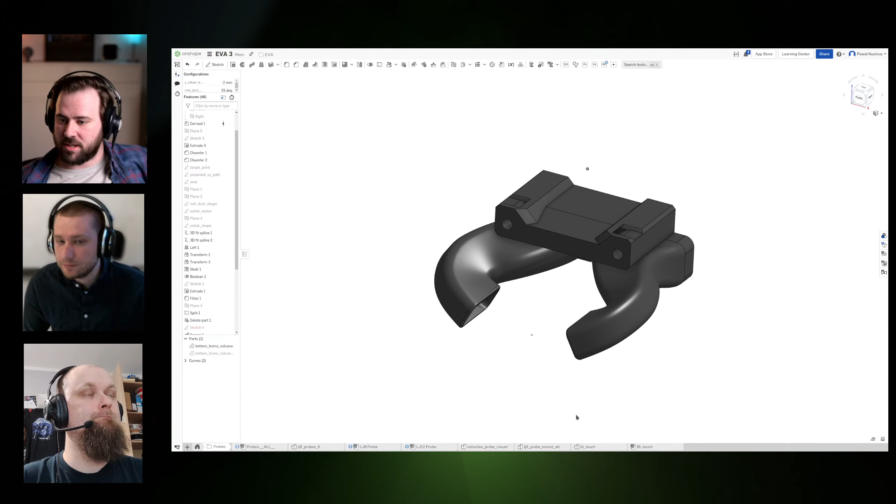For open source projects like Voron, Annex stuff, keyboards, whatever - there's of course no issue because it's not commercial. As long as it's not commercial, you can put it on any printer, right? Oh yeah, just don't buy yourself a golden chopper for it.

For whatever you do for your hobby, or if you're printing parts for somebody and he's reimbursing you for the filament, I couldn't care less, or be able to tell - but I do care. Do it. Convince your buddies. It's awesome, let's do more 3D printing stuff.

But what am I going with it? Use it, please use it. And if you need to talk about it, come talk to me. That would be the best way to figure something out.

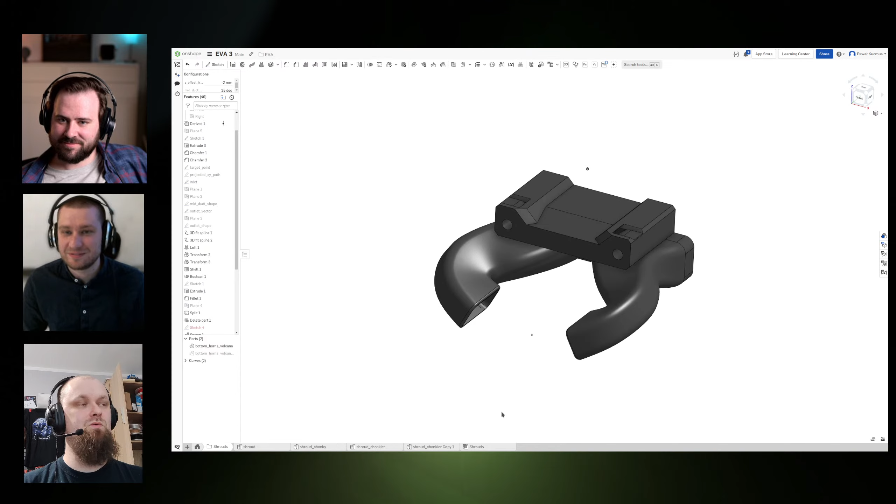People keep mentioning nozzle LEDs. Those things in the shroud, I kind of tried it, didn't get there. All the renders that I do, they light up so nicely when they're there, so I wanted to fit some small LEDs over here in the shrouds. If it's possible, I cannot tell you yet. There should be enough space - it's basically just a question of how you want to route the cables.

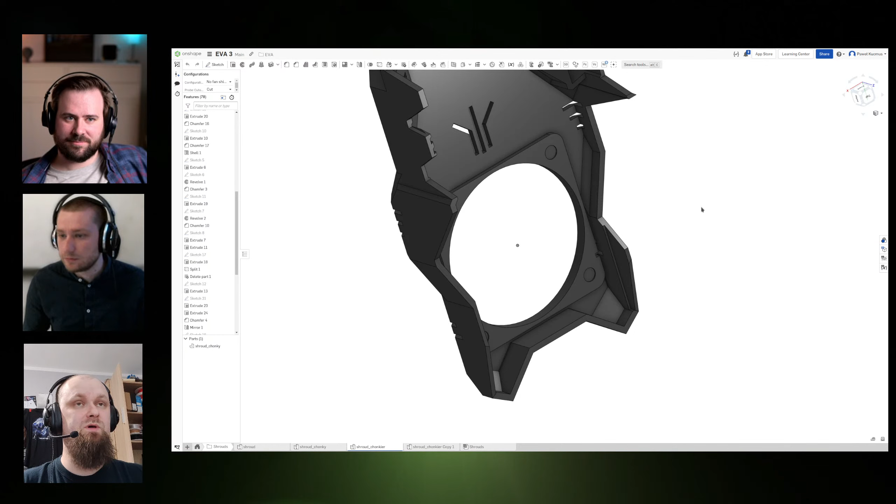I think I left some space around the fan, so you should be able to fit the wires. I'm not sure how hot it can get, if you should hot glue it to a PETG part - probably not, but I don't know. I don't know how to mount them, haven't had that experience yet, but I would like to see people try.

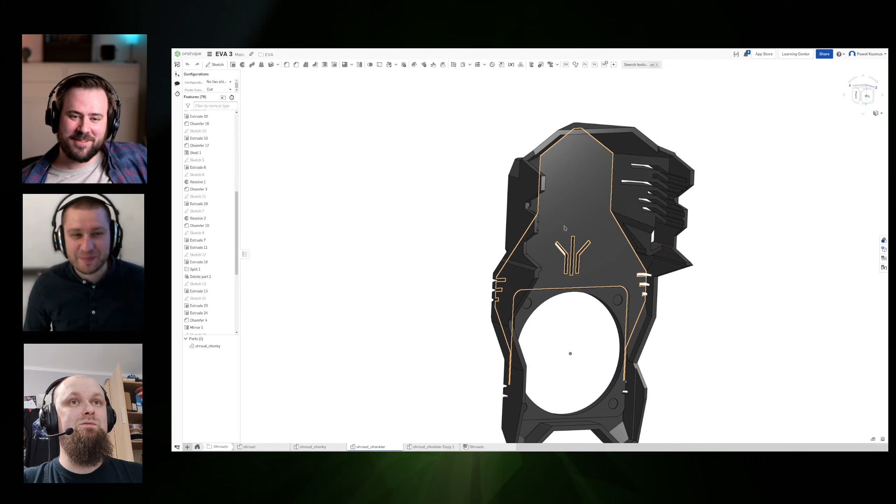I saw an LED thing - I think this was supposed to be the upside-down Atari logo, someone called it. Probably that's why it was in my brain, because my dad is a huge Atari fan. Yeah, light this up, post pictures, I really want to see.

People keep asking for weight as well, and the answer is it's heavier than - oh, Mikkel, your camera is too hot. Oh no, and that's probably your fault. Yeah, no. Well, there's a first for everything - audio, video, and now...

My ESP needs to cool down a bit - my ESP needs to fail right now and we'll have the full stream experience. It's been running for 2 hours, so we talked too long beforehand I guess. Yeah, Mikkel is too hot. Exactly what I meant, thank you. Yeah, right.

About the weight question - like how many grams, and is it increased weight compared to before. I did just a comparison by holding both, but you have to think about how much the plastic actually makes up of the whole hot end, and it's probably not doing a lot.

There's more perimeters for sure, because there's more modularity - the top and the drive parts are separated, so there's a perimeter between them and the front. They're probably considerably bigger, but it's probably a drop in the ocean of the overall weight. But I don't have the data.

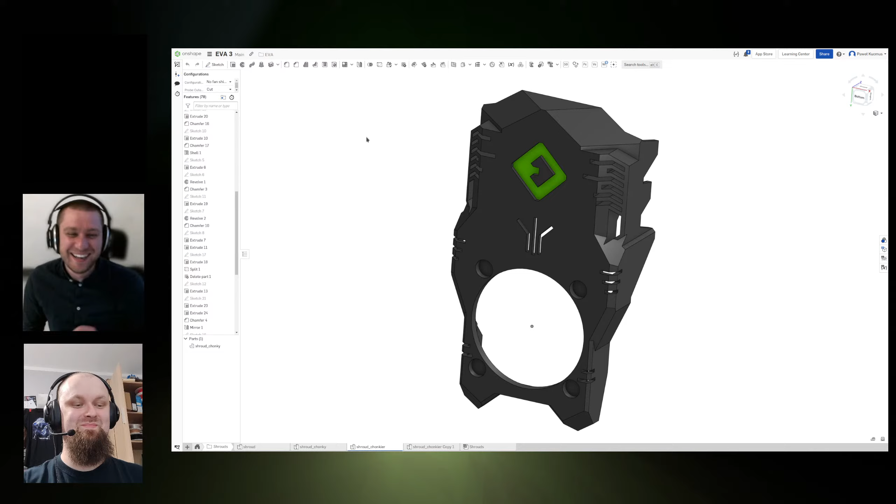Anyways, I think we lost track. Sorry. No, it's okay, everything. I hope, yeah, you'll see a few to-dos when I publish it.

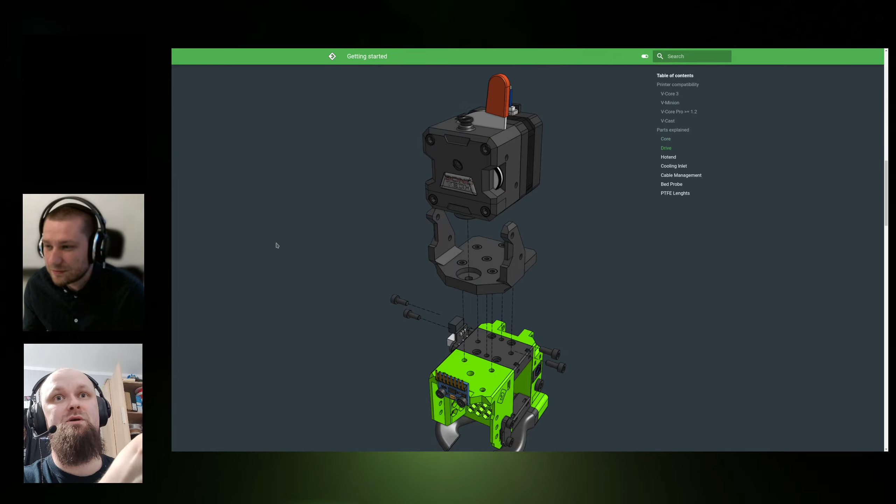The parts should be stable. Everything around it is probably not, because it's a lot of work even to generate all this. There's so much code involved in me being able to even release it, because those many parts times 2 for heat inserts - bloody heat inserts - would require clicking and exporting from Onshape, you all probably know.

Will it work with ASA filament? Right now it should, right? Because of heat inserts, that's a major reason it works perfectly, that's a major reason it was added. So it's ABS and ASA.

For PETG, if you don't care, hex nuts are perfectly fine. Not everybody likes it, or they fall off, or there's stuff like that. I would say it's manageable, or at least I'm used to it. If not heat inserts, there's probably like 50 of them. If you buy heat inserts, buy more, and I warn you, 300 is not a huge bag. Don't blame the Chinese.

300 is 6 EVAs worth, right? It's like 45 heat inserts or hex nuts for each EVA, so it's a lot.

Everything should be explained over here in the getting started page, and then you have the, I hope, nice heat insert and hex nuts separation over here. So if you're in one category, those should be the same from here to here, but you will have the specific components over here, and you just click to

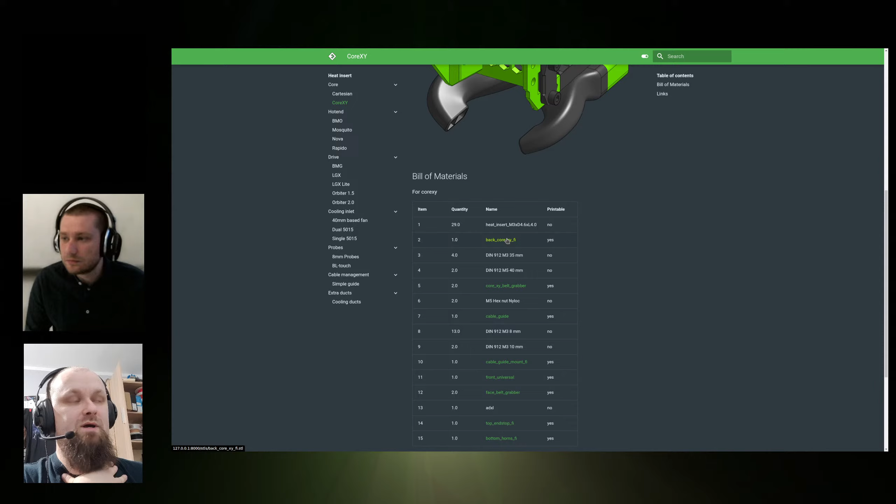download the STL, or go to GitHub, and there is an STL directory, and you can pull the whole thing there with a bunch of Python code, but just ignore it. Just look at the STL directory over there.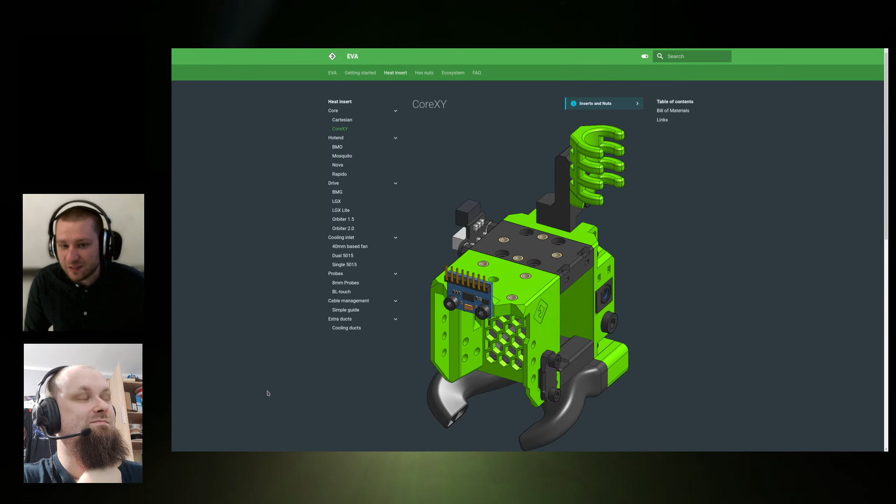Easy reuse of heat inserts - it kind of bothers me when I'm throwing away broken parts that I can't throw them out to the plastic bin. But I guess it is what it is. Maybe I'll melt them and take them out or something. It's actually easy to remove them, I did reuse them in the past as well. You just need a really cheap tip that goes in when you push it in and pull it out.

I haven't used that one yet myself because I've been running the tool board. I did use it on the minion. On the minion I don't use the toolboard, but yeah, I actually pushed heat inserts inside, although the holes are not dimensioned for that, but it still works.

Um, I saw something else. What was it? I lost it.

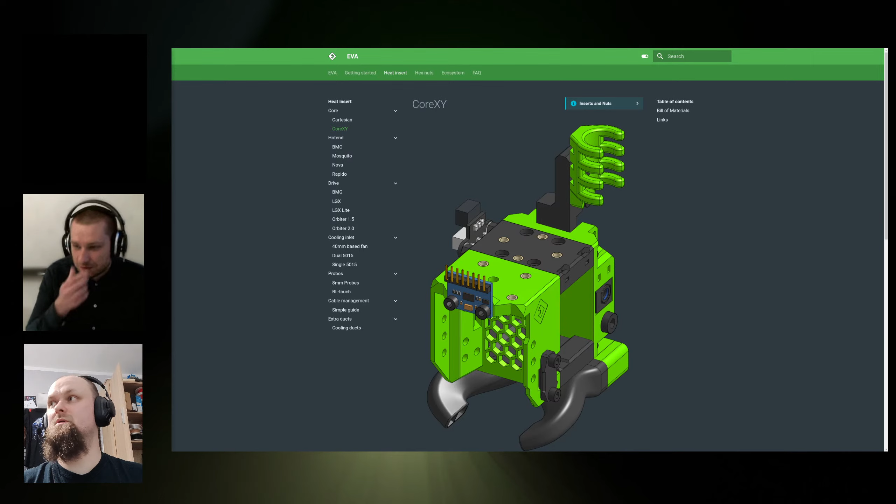I'm fixing Mikkel, give me a moment. Oh no, you can't fix me. No, I just need... I tried to move your GitHub picture.

I'm gonna turn on the camera again in just a second, I'm just giving it some time to cool off.

No worries. Can we share pictures now? Is the question. Also, when will you release EVA? 15, yeah, 15, 30 minutes after this.

I have the git push command typed in the terminal, so I'll push it. I need to build the docs and publish them, so it's going to be on the main page. If you need to go back to the older page, there's going to be a tag over there. The documentation won't be there anymore, but if people really nag about having the old documentation, I'll deploy it on an old EVA page or something like that. So just let me know.

Can we share pictures of EVA? If it's only EVA, sure. Please do.

Yeah, there's a very important thing - please share unless they're purple. Don't do purple, they're not compatible with purple, or any color which represents any other company of 3D printing. Basically any color by now. Yeah, that's a big no from Vector.

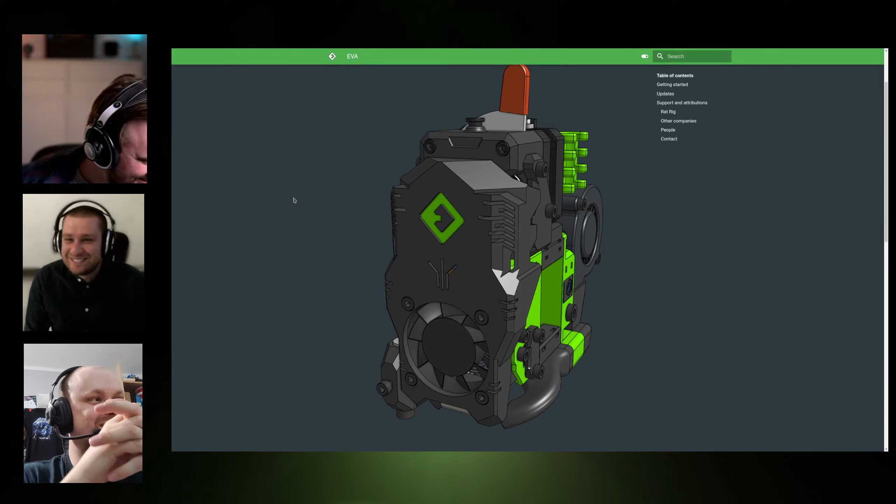And now I used RatOS 1.2 for the first time with the hotspot configuration. I'm still, and I'm not even trying to be nice, I don't think I need to be nice to Mikkel at this point - it is like the documentation, like everything. The first time I had to set up Klipper and learn all that, it took like 3 weeks, I was trying to do that on a Prusa clone or something like that. And this thing right now with the hotspot especially, it was a bliss.

I'm still a bit excited about it. And even the input shaping thingy works well, it's like more quiet. I don't know if that's mechanical, but yeah, or maybe that's the other thing. Yes, so yes, that's going to be exciting as well.

Green vector, yeah, you should get some green ABS.

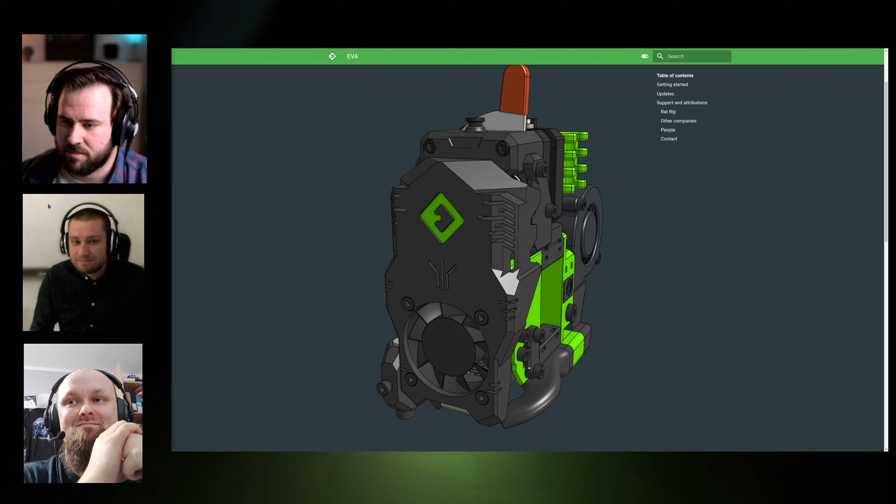That's a big one, and I'm thinking toolboard support might be coming in 1.3.2. We also have a couple of boards coming as well, so that's going to be nice, but it's probably going to take a month's time or something. So yeah, that's the quick update on my front.

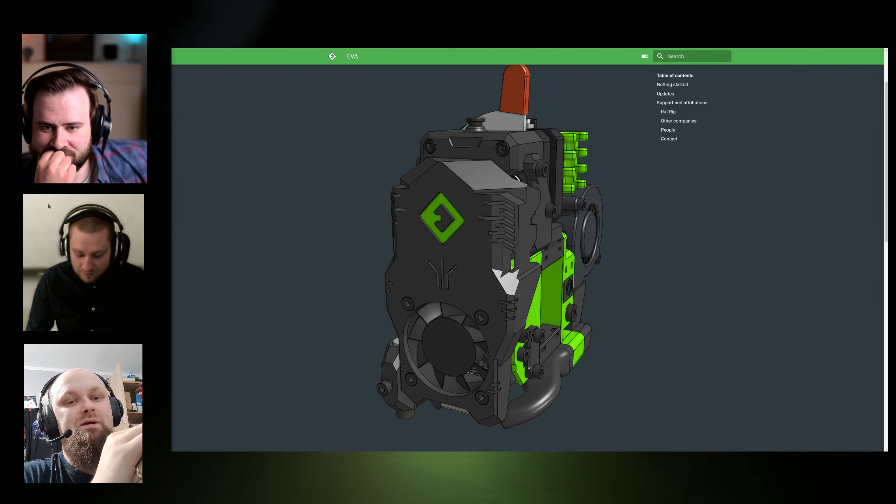It was also one of the things to procrastinate about. You know what, thank you, and now that goes away.

So now pre-made wires would be nice. Pre-made lengths, or like one connector. Figure it out, board people, board manufacturers. One connector, so I can just click it and it would work.

But basically toolboards already help. It's like a third of the crimping you do with those. Yeah, it helps a bit.

So you have power and USB-C to your toolboard, right? That's another thing I might mention. When toolboard support is coming to RatOS, it's going to be via USB, no CAN. CAN is stupid, I hate CAN. It's slower and it uses more resources and it's too complicated to set up for people. USB just works with a proper USB cable, and you can flash it automatically.

This is important for me because we already see it with the SKR 2 and the Manta. I hate there wasn't a better board available for that one at the time, but as soon as Klipper makes changes to the microcontroller code, people's boards need to be flashed and they get the error. They spam the RatOS support channel with the same error message. I just want that to work, it should just happen automatically.

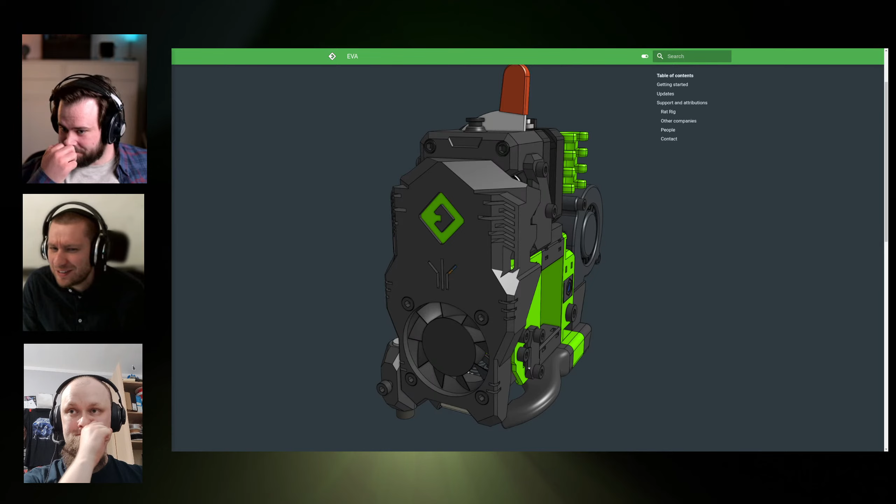There's a question about belt tension, which I don't really get, because belt tension depends on the printer, not on the print head, so it's really hard to answer. If you want a tip: less than most people think is my opinion - that's a good tension starting point.

And the hertz thing depends on so many things that you kind of cannot or should not guess it, right? I think we shouldn't go too much into it, especially with the controversy around it, because there are a lot of different opinions on this topic. We're gonna end up pissing someone off. Let's call it my personal opinion on this topic.

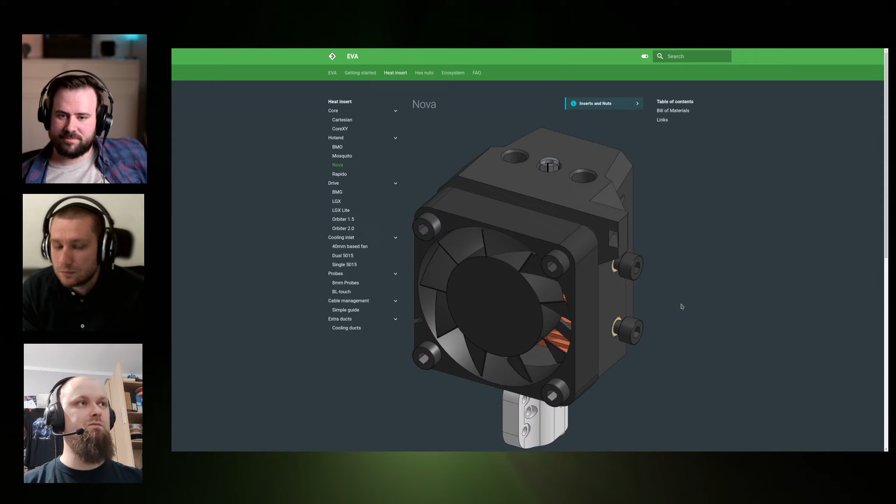And it's easier because you can shove it all the way into the hot end, mount it in the universal front, and then just try with the drive over and over and cut by 1 millimeter until you're good. That's how I do it.

Actually, me too. I'm not checking those measurements, I'm just doing what I just described. I actually didn't know you have to add them up. I once read one on a hot end and it was completely off, so then I was like, okay, I can wing it.

I'll add a script for the ADXL 345 belt tensioning stuff in RatOS. I actually have it, I just never published it, for I don't know, I think bad reasons. Procrastination.